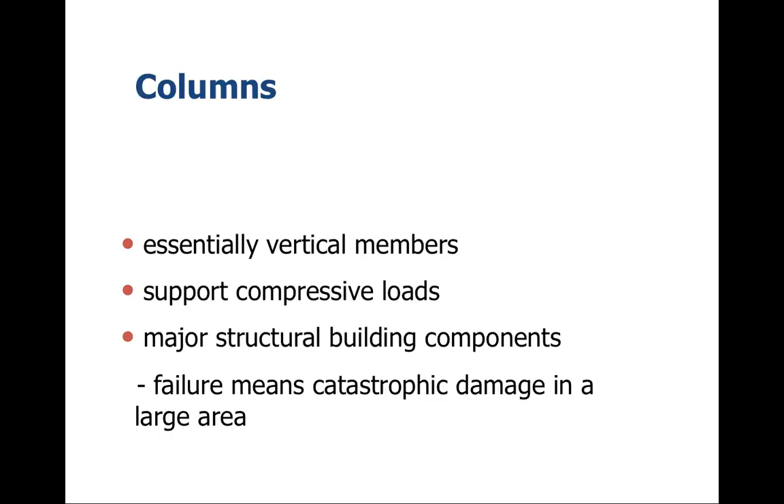This presentation is about columns and how we want to analyze and examine columns for this class. Basically, columns are essentially vertical members. They support compressive loads coming down from above, and they are a major structural building component. Failure, in the case of columns, usually means catastrophic disaster.

So they need to be designed correctly. Some of the considerations with columns: number one, what kind of material are you making it from? A column could be made of steel, or concrete, or even wood. Another consideration would be the length of the column. How long is it? How tall is it? Is it a short, fairly stubby column, or a much longer column where we have other considerations? The size, or the geometry, of the column also comes into play. How wide is it? How narrow is it? And those sorts of things.

And finally, we need to be aware of the end conditions. How is it fixed at the top and at the bottom? Is it fixed very stably, or can it rotate, and how might that affect our considerations?

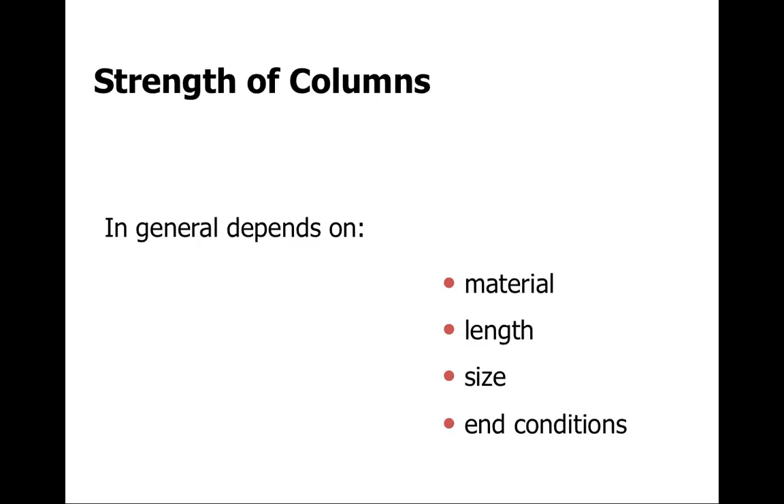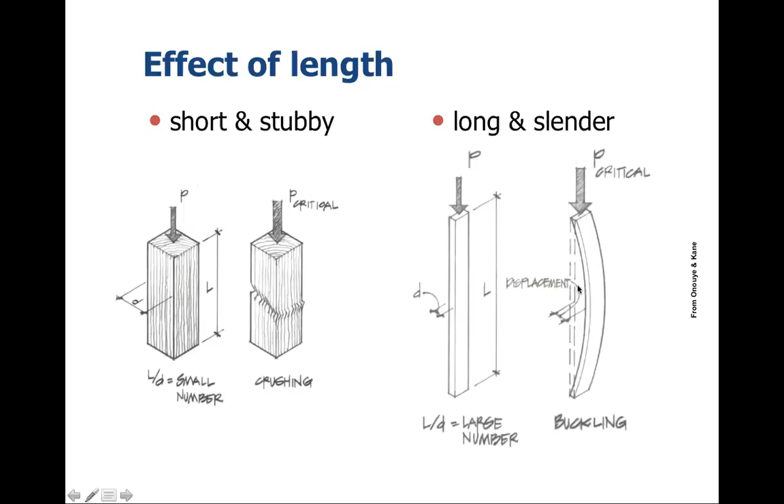It's quite different when we get to long and slender columns. Here our concern is about buckling. What might happen with buckling? With long and slender columns, we have a much greater length. The column is much taller, and potentially the distance on the short axis is much smaller. So what we have to be concerned about is this displacement that we describe as buckling, and that kind of phenomenon.

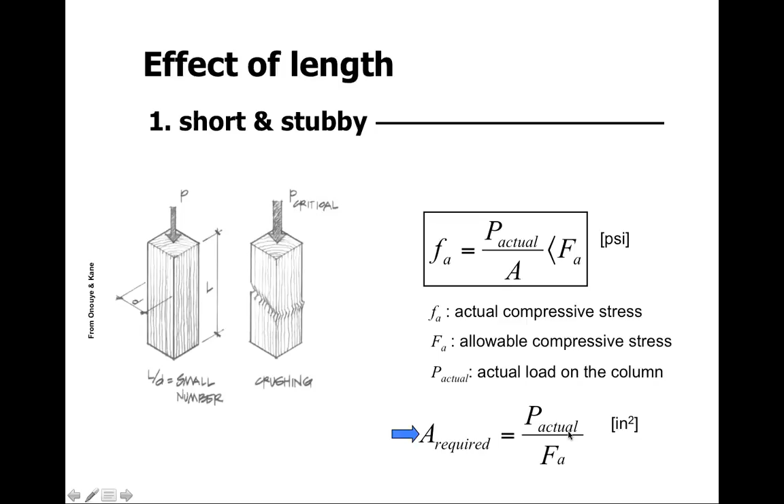So it's often a matter of determining the area required. How wide is it? How thick is it? So that P actual over A is less than F sub A.

In the case of buckling, we have long and slender columns, and the buckling will occur along the axis of the shortest dimension. So if this were something like a 2x4 or a narrow steel column, it's going to buckle along that short axis.

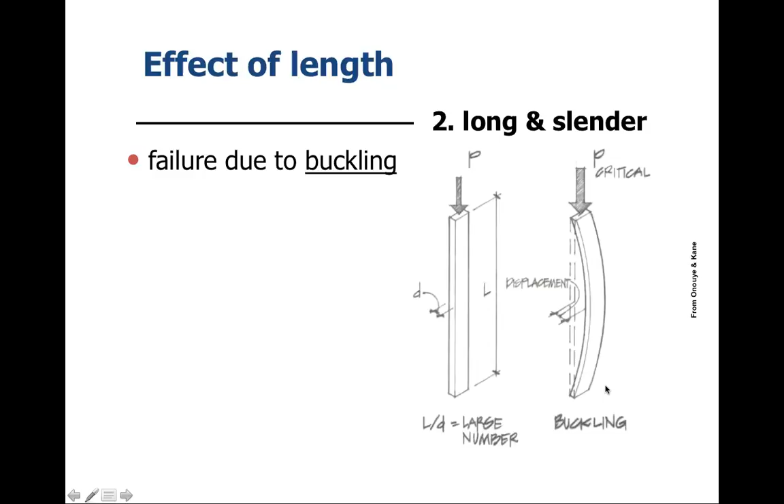Buckling, as far as the definition goes, would be defined as uncontrolled lateral displacement of the column, at which point no additional load can be supported. And we have to remember that even if we think everything is loaded symmetrically, loaded at the center, there are certainly going to be eccentricities in terms of how the load is really going to be placed, and also certain irregularities of the materials, which are going to cause the buckling.

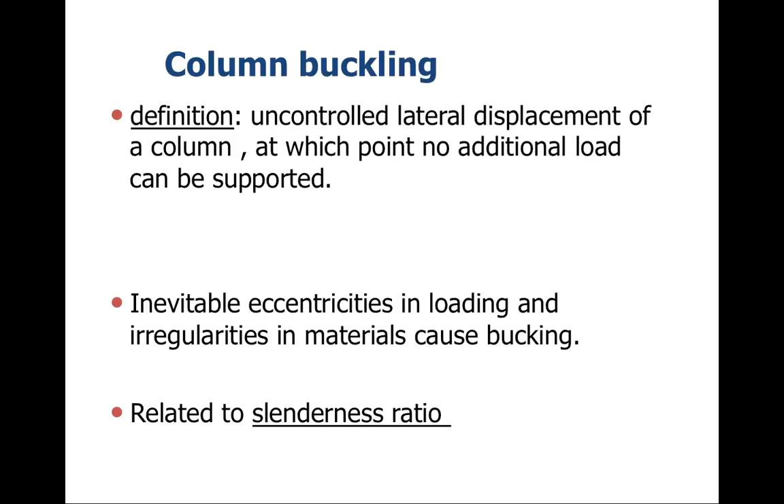Much of this is related to the slenderness ratio. Slenderness ratio is basically the length divided by the narrowest dimension. So, in terms of the buckling load, this is going to be related to the deflected shape. Here we use Euler's formula, and Euler's formula comes down to two factors, E and I. E again comes back to our modulus of elasticity, or the stiffness of the material. I would be the moment of inertia in the minimum direction.

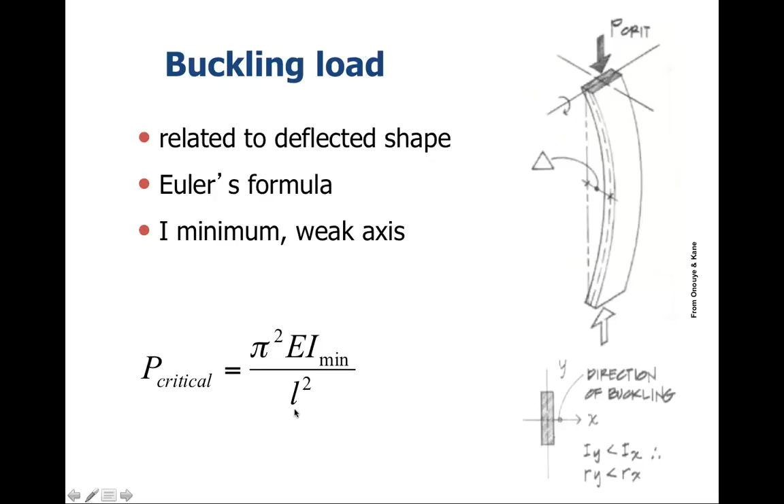So if we have this column right here, we have two axes, the y-axis and the x-axis. Which one is it going to buckle along? It will be strongest along the x-axis and weakest along the y-axis. So here is our formula for Euler's equation: P critical is equal to pi squared multiplied times E, the modulus of elasticity, times I, the minimum, all divided by L, the length of the column, squared.

So in terms of the buckling load, we have P critical equals pi squared EI minimum over L squared.

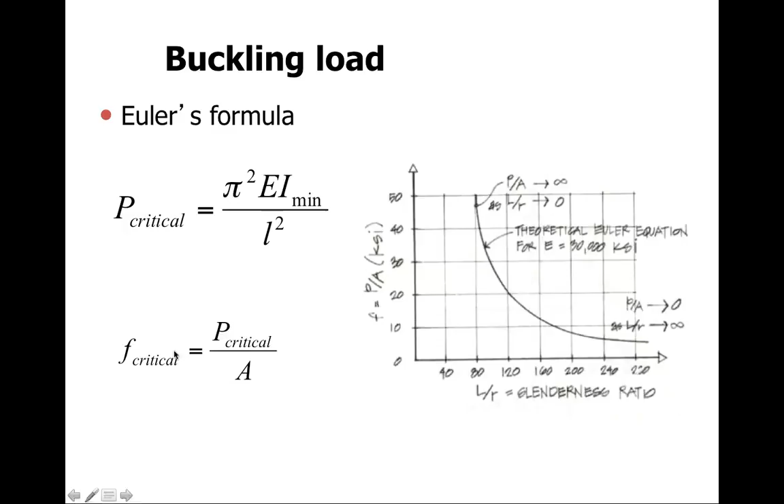Alright, so some things related to the slenderness ratio. We have two scenarios: one for steel and one for timber.

One consideration is the end conditions: how is it fixed at the top and the bottom? Another consideration is the effect of length, the length of the column, and also the size, the cross-sectional area, or the geometry of the column.

So we have L, the case of the braced column length. We have K, the effective length factor. R is another point that comes into it, R being the radius of gyration with respect to the axis of buckling, and D is equal to the least lateral dimension.

Here's an example of our column, a 4x4 column, with a load it's carrying. Some considerations are how it's fixed at the bottom here, and also how it's fixed at the top.

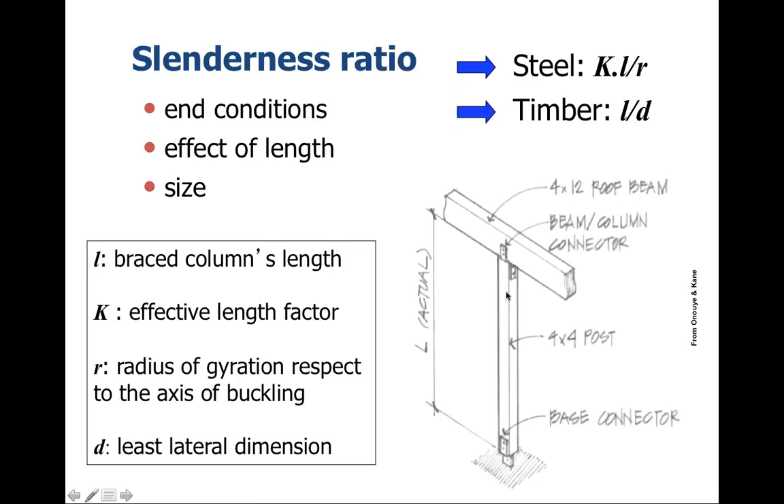In terms of the effective length factor, which relates to how the column is actually attached or fixed at the top and the bottom: if K is equal to 1, we're assuming it's pinned at the top and the bottom, and the effective L is over the whole length or height of the column. So it can rotate freely as soon as any load is applied. That would be K equal to 1.

This is another scenario where it's fixed at the bottom, so it can't rotate very easily at that point, but it can rotate as a pin connection at the top. In this case, we have a shorter effective length, K is equal to 0.7. Then what about the case where it's fixed at the top and the bottom? Here we have K equal to 0.5.

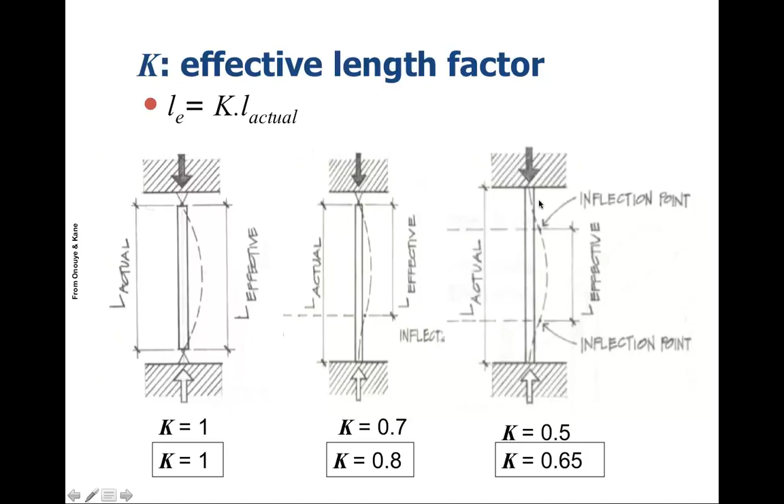Another factor we use in terms of buckling is the radius of gyration. It's hard to provide a very good definition for the radius of gyration, but basically it's a measure of the inertia with respect to the area.

And of course, this comes back to having two axes here. So here we have this I-beam. We know it's going to buckle more along this axis, as shown here, and not the other axis. So we have R sub x equal to the square root of I sub x over A, versus R sub y, which is the square root of I sub y over A.

So the least radius of gyration represents the weakest response to buckling, or the place that buckling is most likely to occur.

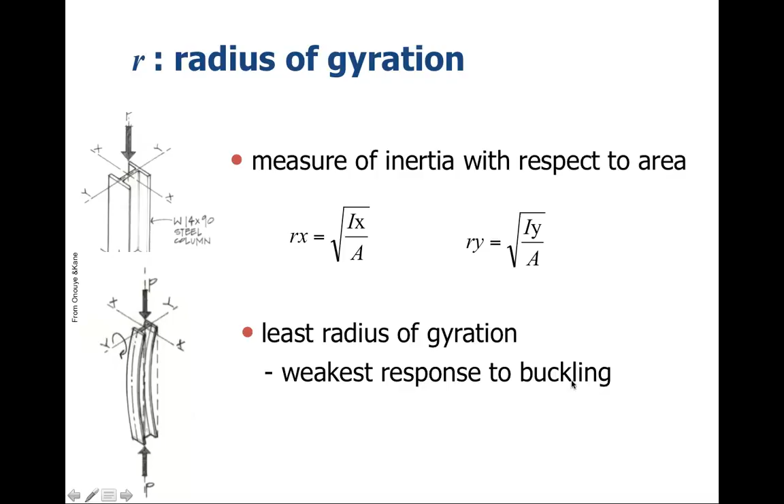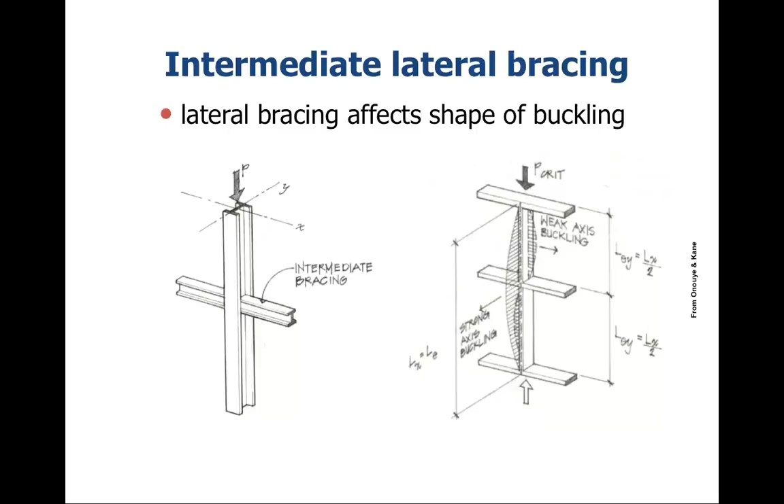Now that we have some idea of how we look at buckling, what can be done about it? Primarily, lateral bracing, which limits the effective length. So you have lateral bracing along here. We know this is liable to buckle out like so. If we brace it here, we've basically shortened the distance where buckling can occur. So now we have this shorter distance instead of the overall distance - we've effectively shortened the length of the column with respect to its buckling response.

We have two planes of buckling, and both should be checked: the strong axis buckling and the weak axis. Here are examples with the I-beam - it's more likely to buckle in this direction. So if we have the strong axis, we could probably use this whole length, so we're not as worried about buckling along that axis. But here we have the weak axis, so we have to support it along the weak axis in the center of the column length.

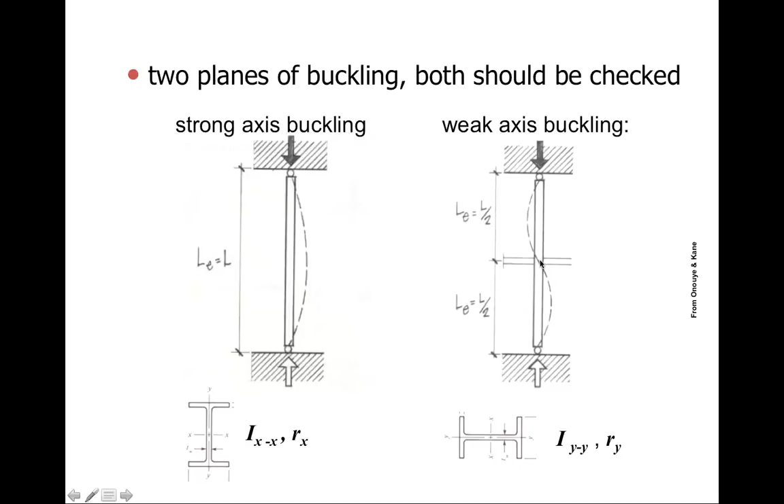Alright, some other things related to steel columns. When the column gets short and stubby, F sub y will limit the load, F sub y being the yield stress.

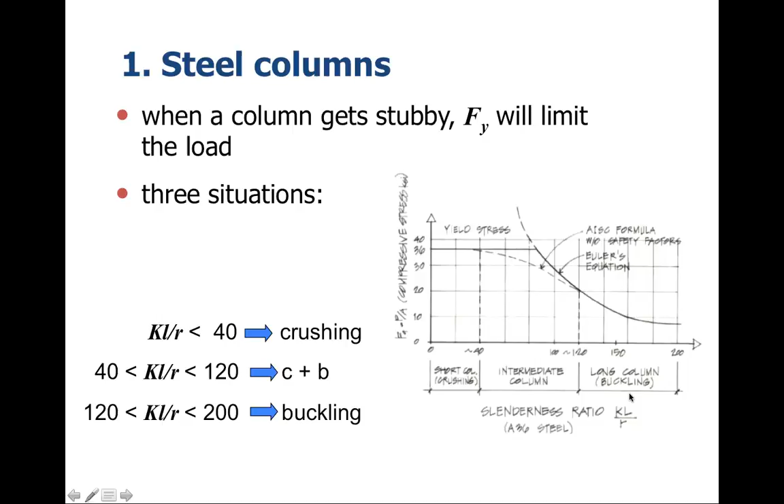So we have three situations. One where K times L divided by R is less than 40 - here we have the crushing response, in this particular zone. The column is behaving as a short, stubby column, and we're looking at crushing. Between 40 and 120, relating to this zone, we're somewhere in between - we have both crushing and buckling to be concerned about. Between 120 and 200, we're really dealing with long columns and the potential for buckling in those columns.

Now, if we have a short, stubby column, we have something on the order of F sub C equal to P over A, and it has to be less than or equal to F sub C, which is the allowable compressive stress parallel to grain. One thing about wood is that it has a much higher crushing strength parallel to grain than perpendicular to grain.

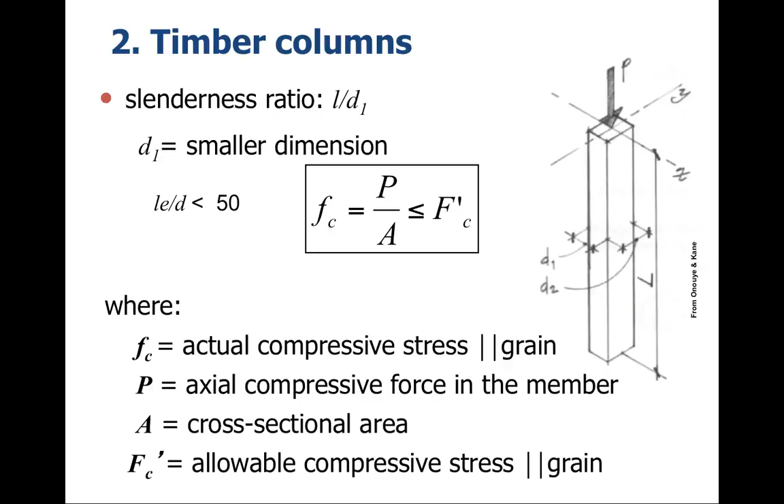All right, so some practical, real-world examination of columns. Of course, we see them in lots of different applications - columns that hold up decks, columns that hold up very tall decks, and those sorts of things.

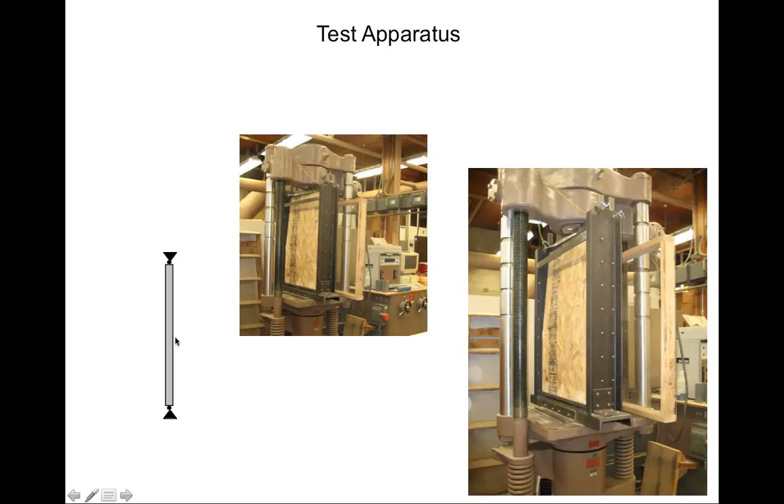So we ended up building it so that it could basically rotate at top and bottom in this manner, and in that way we basically induced some type of buckling response.

And here are the failed columns. By the way, these columns were able to support anywhere between 17,000 pounds and above that, so they're fairly rigid and fairly strong columns. But here's showing the columns after buckling.

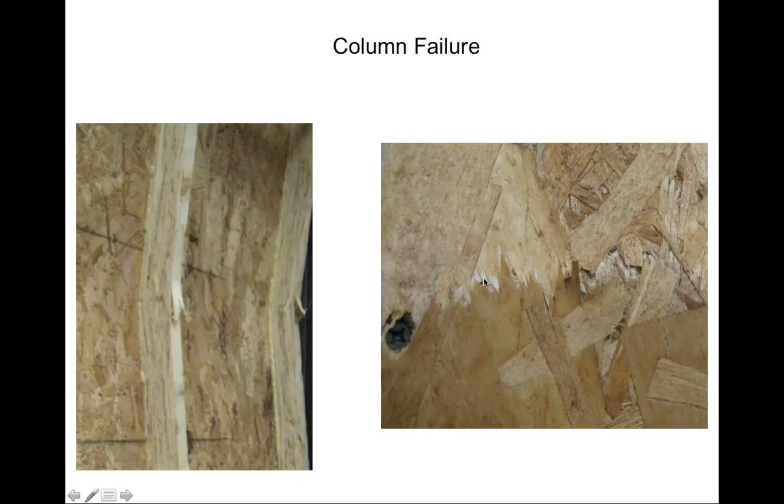Here's showing how the OSB basically failed in this case. And in order to use the pin connection at the top and bottom, here we have the pin, here we have the plate that the column basically sat in, and here's the pin connection so it could rotate.

So in this case, here we are - this is the way we set it up ahead of time. The load would be applied, and it rotates to facilitate the buckling of the column. In that way, we were able to make that kind of determination for the columns.

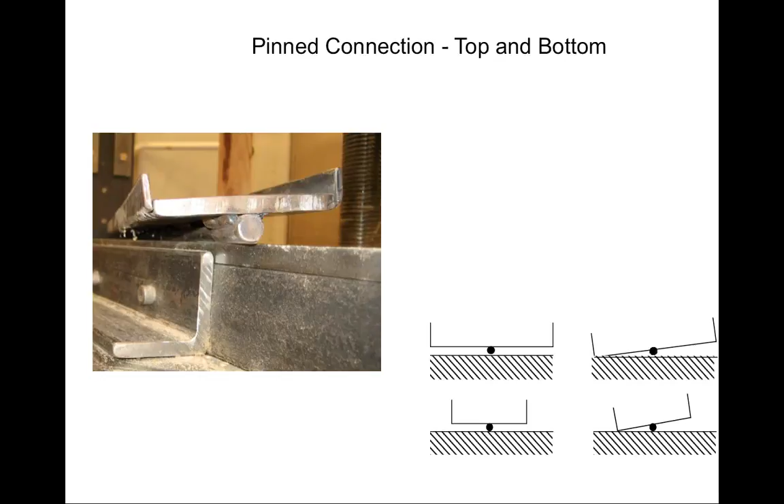So this wraps up what we have on columns. Thank you.